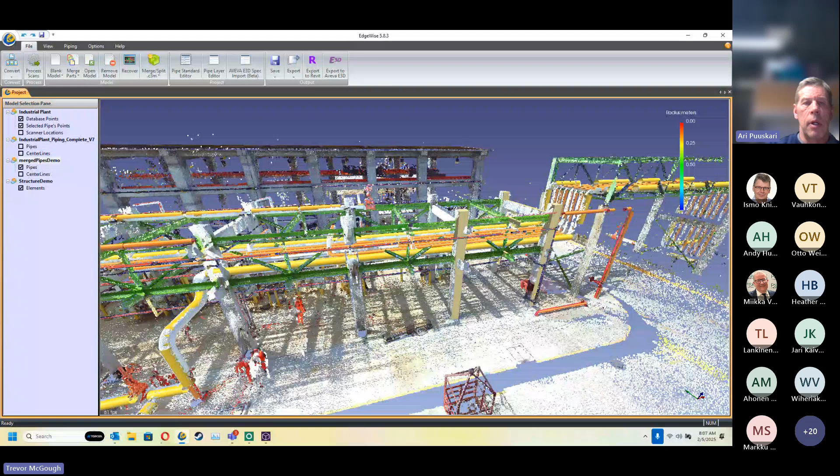So, up on screen we have Edgewise. What I've done to get to this point is take the point cloud data - in this case a registered point cloud - and process it through Edgewise, which has automatically extracted the piping. All these pipes currently on screen are automatically generated by the software with zero human intervention whatsoever - purely the result of automation.

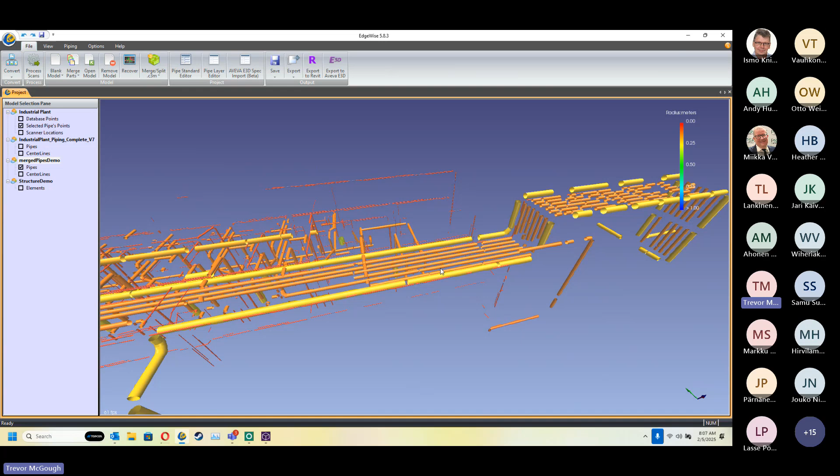This case involves about 20 scan files, which took about 45 minutes of computer processing to get to this point. The first key thing I want to show in the software is our QA/QC tools. For that, we have the part info spreadsheet right here, which contains all the numerics relating back to our visual model.

Coming back to that concept of QA, we have the QA mode. Inside the QA mode, I have the bore of the extracted pipe in gray, and in this teal, kind of green color, I have all the points used to extract out the pipe. I can quickly scroll through and do a visual inspection of my pipes, ensuring the highest level of accuracy between the point cloud and the pipe.

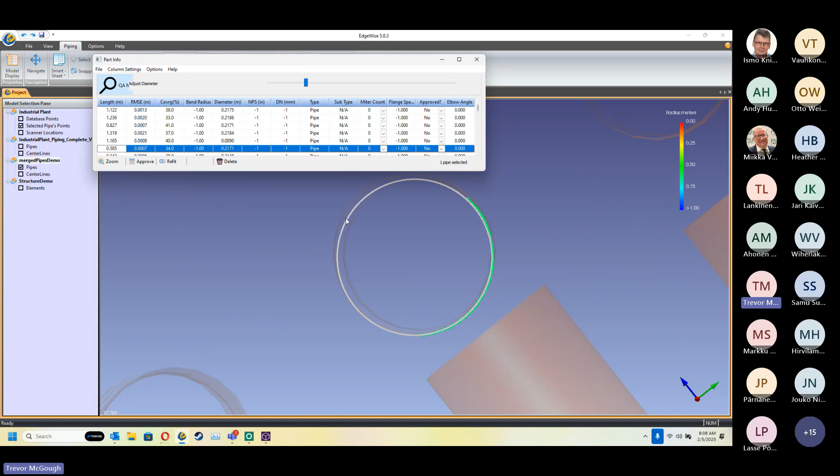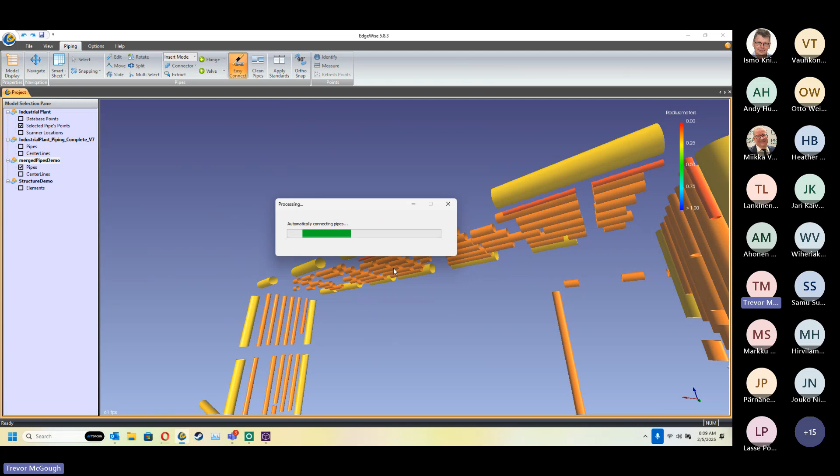The next thing I want to talk about is these little gaps. Scanning is a line of sight operation, so if there are areas where the scanner cannot see, like behind structural steel blocking the scanner, there's no data, no pipe. Instead of going through and doing these connections manually, this is where I have the Easy Connect tool, where Edgewise will automatically insert connections, both straight and elbow connections throughout my project, and that only takes about a second.

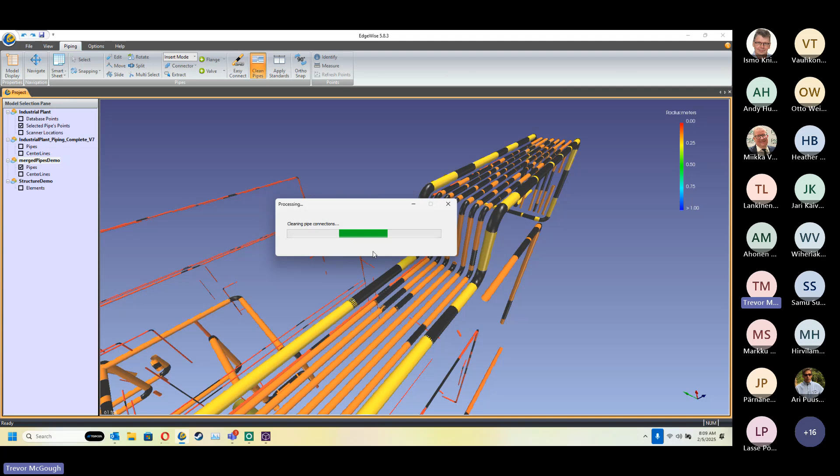The next key thing I'll introduce is the Clean Pipes tool. The Clean Pipes tool is rather unique in that it has a tolerance. That tolerance allows me to control how as-built or as-designed the model will be. I can make more straight, perfect pipes, or choose to make pipes that are more as-built, with more sags or deviations. I can control that at either a project level, or for individual pipe runs.

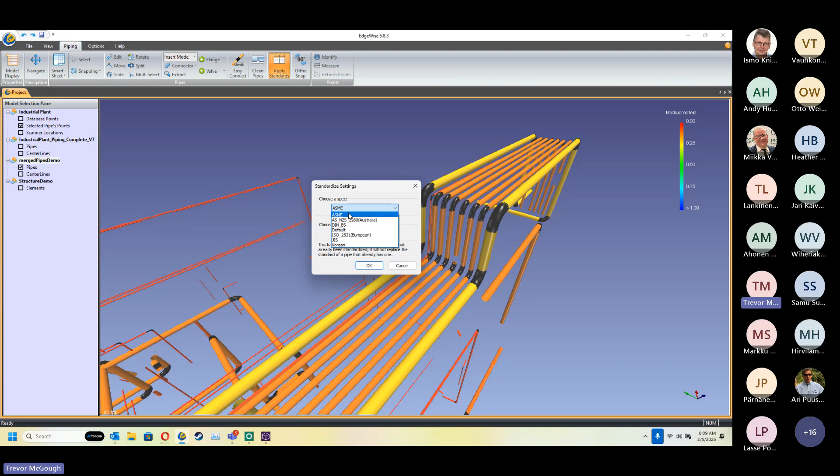Next up, we have applying standards. With apply standards, I can choose one of our specs from out of the box, like the ASME spec at 150 PSI, and click OK. You'll notice a slight shift, as this is where Edgewise takes the diameters found from the scan data and matches them up to the closest standard spec diameter.

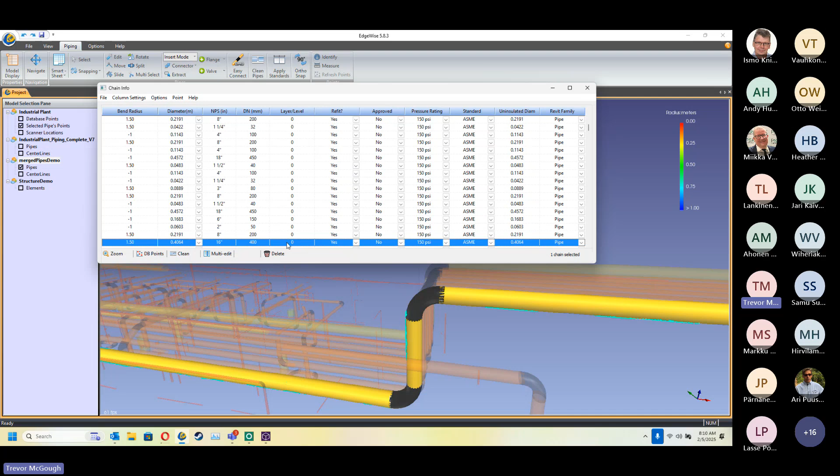The last thing I'll touch upon is the chain info spreadsheet. This allows me to see information relating to the whole pipe run, including layers and levels, diameter information, and Revit families. One critical thing to point out, especially when working in oil and gas like with AVEVA's E3D, is that the layers are how we assign line information, ensuring it is properly transferred from Edgewise into E3D under the correct hierarchies. Those layers are especially important when working with the AVEVA ecosystem.

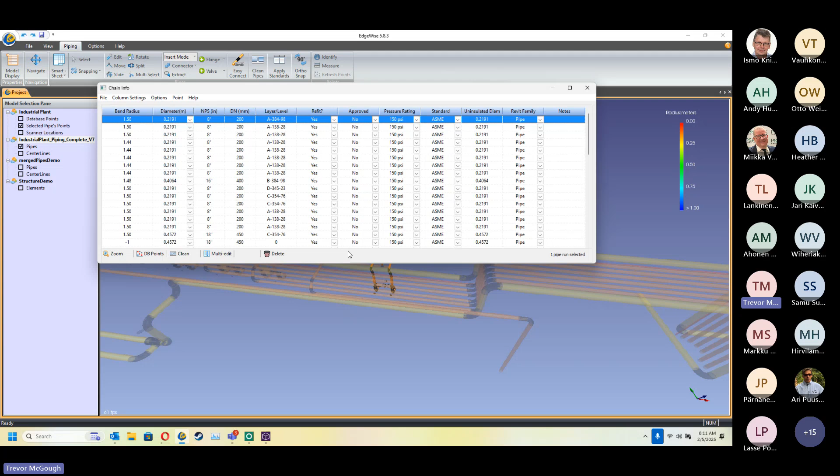Speaking of that, let's take a look at exporting from EdgeWise into AVEVA. I'll switch over to my completed model, which is about 2 hours worth of work, where I've cleaned things up, done my connections, added some componentry, and assigned the correct information for my pipes. At this point, I'll go ahead and pop this out. We have our export to AVEVA E3D right here.

I'll go ahead and save this to my desktop real fast. Let's do this. Webinar.

Now let's switch over to the E3D application. My little disclaimer: I make no claims of being an expert in E3D.

Let me go ahead and import this in. I'll drag and drop that macro file I just exported right here, come over, and pop this in. Let's go.

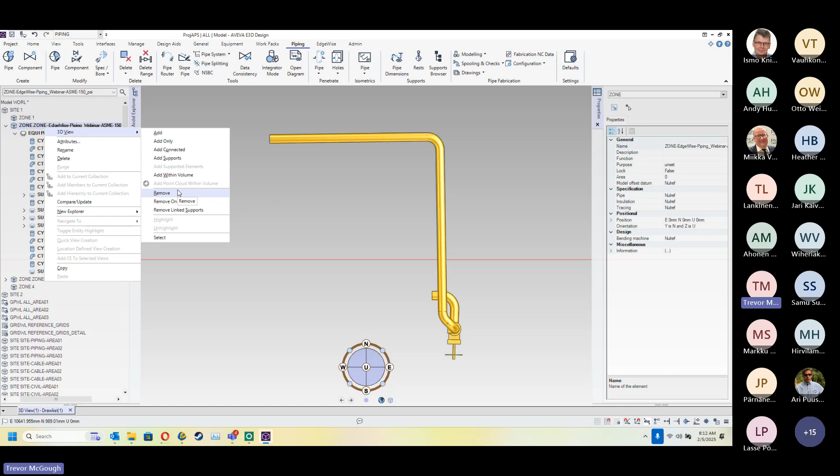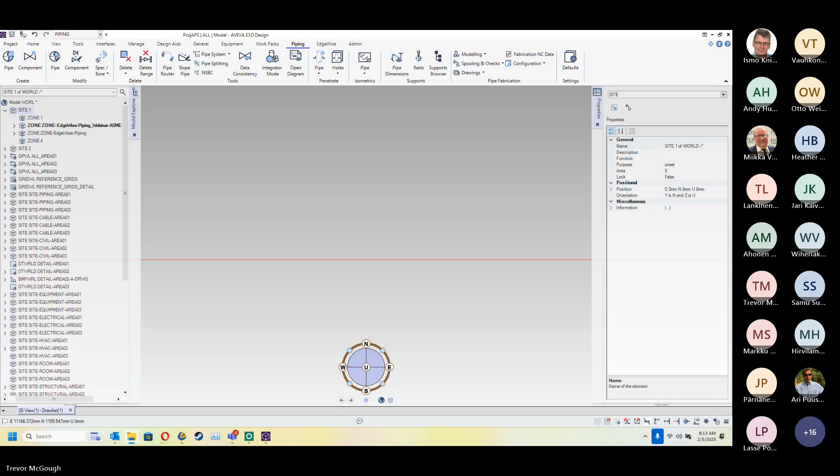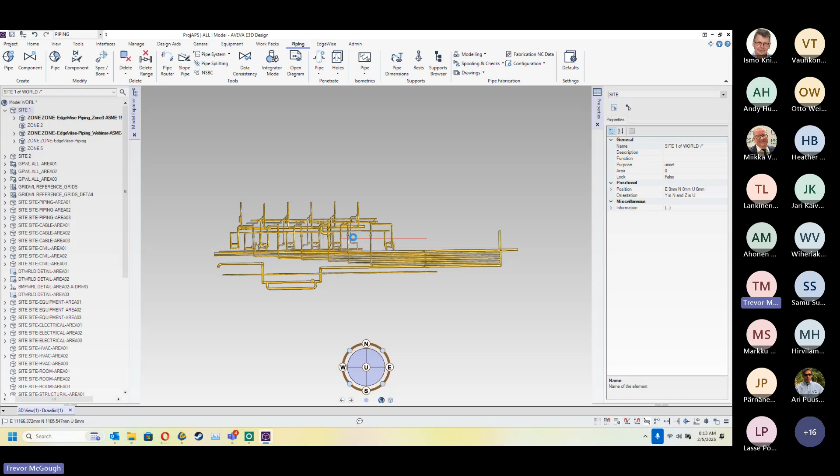Oops. Oh, that's why. Okay, that took me a second. I was putting it in the wrong zone. There we go. Whew. Still early in the morning over here.

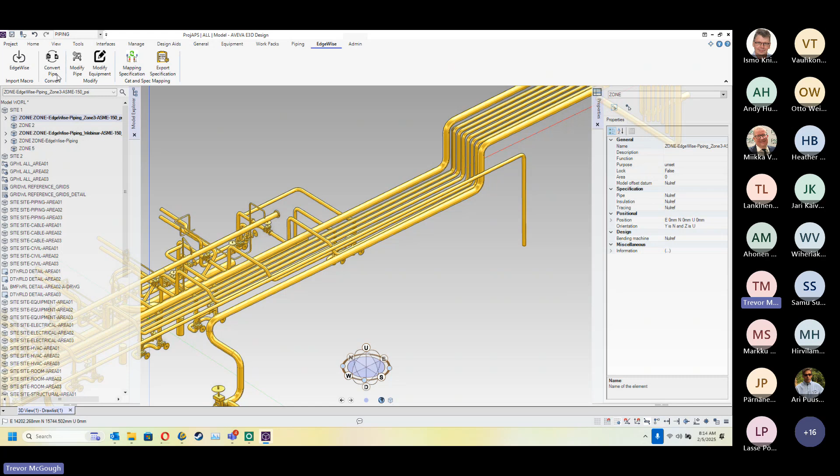So now that we have the pipes loaded in, this is where the cool part happens. Up here at the top, behind the little Teams toolbar, you'll notice there's a new Edgewise tab, and this is the plugin that we've developed that allows us to convert from what we have currently, which is our equipment, over into the intelligent piping. So to actually do that workflow, I'll click Convert Pipe right here, and then we have a couple things.

Number one, at the top, I can select my spec. I only have the default specs loaded right now, but if you have your user-defined specs, this is where they would be. Once I do that, I can convert the equipment that I have loaded in. So I'll just grab that one right there, click Load Equipment. You can see there's a little loading bar down here at the bottom, and this will load up all the equipment that was initially brought in from Edgewise into AVEVA E3D. And that way I can begin the conversion process.

This is the part that probably takes the longest in the demo, so bear with us. All right, we got that loaded in now. And so now I'll go ahead and set my export zone. So right here, we have zone 5. We'll go ahead and click Store Zone.

Now that we have everything loaded up, let's go ahead and do Convert Primitives to Pipe. So this will begin the conversion process like so. And then at the end of this, we'll have our fully intelligent pipe runs converted from what Edgewise brought in as the initial equipment into the intelligent piping that we would like inside of AVEVA E3D.

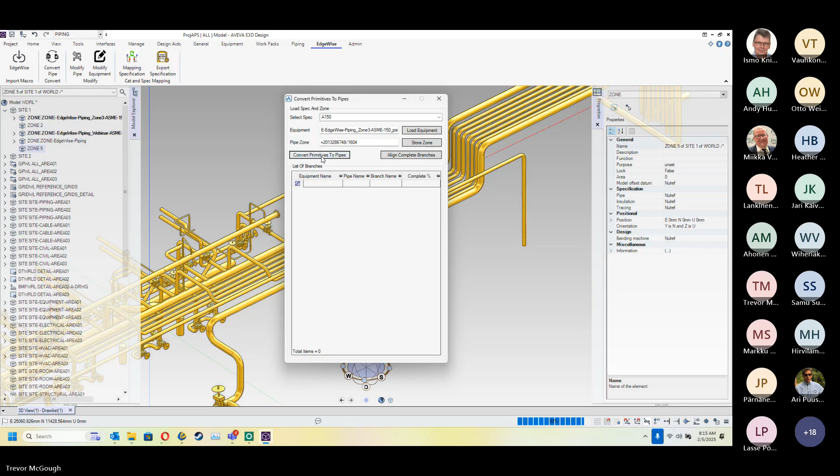So there are a couple of questions. How does it work when pipe is insulated, and how does it work with sloped pipes? Yep. So to answer both of those questions, number one, insulation. With insulation, the scanner can only see the outside diameter. And so by extension, that is what Edgewise will extract the piping to, since that's what the scan data captures.

So you have two things you can do. You can either A, export out the insulated diameter from Edgewise, or B, back inside of Edgewise, you can manually use the spreadsheets. If you know what diameter should be there, you can manually override and select a different diameter, like that. So either or, but again, with insulation, Edgewise will extract it out to the insulated diameter, since that is what the point cloud captures.

The second one, slope and in general as-built conditions. With slope and as-built conditions, Edgewise will capture those right off the bat. The thing is, depending on what application you're going into, for example AutoCAD, Revit, AVEVA E3D, some of those applications are more design focused, so they don't usually accept some of the as-built conditions.

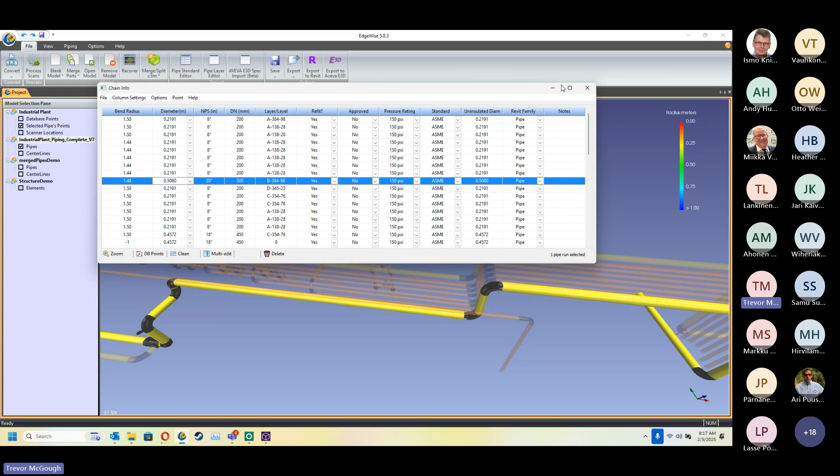So in that case, we have several tools, including snapping tools right here, as well as modifying the tolerances in my Clean Pipes tool to get rid of some of those as-built conditions and make the pipes a little bit more as designed, so that way they can import better into some of these design applications, like Plant 3D or AVEVA E3D. So in general, yes, Edgewise captures slope, but there are some export limitations, depending on what application we're bringing them into. And speaking of export applications, let me go ahead and minimize that.

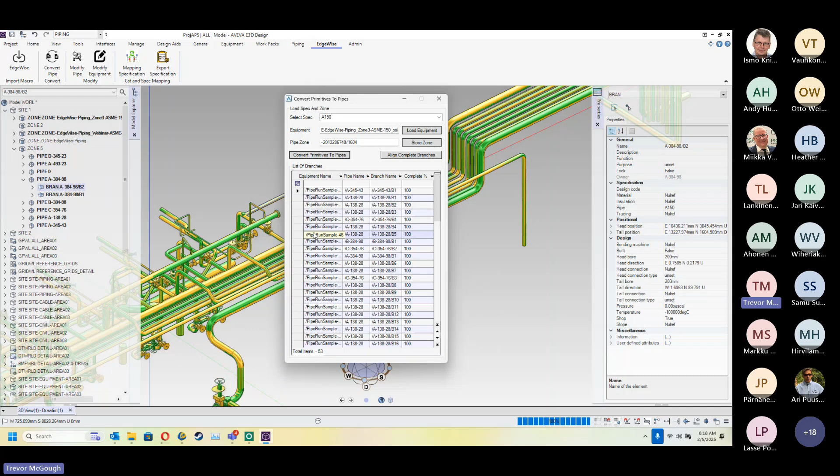Here we have all our pipes converted, so we can see everything right here, our different branches completed inside of AVEVA E3D. So if I go ahead and kill that, let me go ahead and... it always takes me a sec bouncing between different softwares. There we go. So now we have all our pipes loaded in.

If I select a run, we can see the information, everything brought in right here. Again, all of this is fully intelligent pipe runs brought in from Edgewise into E3D. And then once it's inside E3D, we can use our plugin to convert it over to the fully intelligent specs. So there it is.

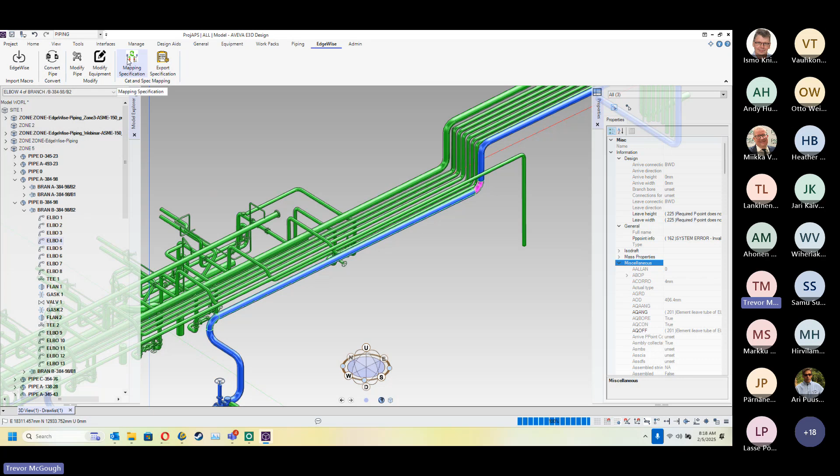And again, I make no claims of being an expert on E3D, so if there's anything anyone wants to see, by all means, feel free to type it in the chat, and I'm more than happy. It might take a second, but I can click on the correct buttons to see it.

Yeah, there are a few questions, Trevor. Yep. There is one more question. Does it work with different standard profiles? Yep, so that's something we put a lot of effort into. Again, especially inside of E3D, ensuring that you can use the custom specs you have developed.

So if we go back inside of Edgewise, we have a special little one right here for a spec import, currently in beta. So that way you can import the specs from E3D and use them inside of the Edgewise software to ensure your Edgewise model is inside of that spec. And then when it pops back out into E3D, everything should be properly aligned. So it should be a little bit more of a bi-directional integration.

Sweet. So again, that is the piping. Okay. And that is how we can take the piping from Edgewise into E3D like that. So any other questions before we... yes. So one thing, yes, the pipes do initially, keyword initially, come in as equipment, and then using the Edgewise plugin that we have developed right here, we can take that equipment and convert it into the intelligent pipe.

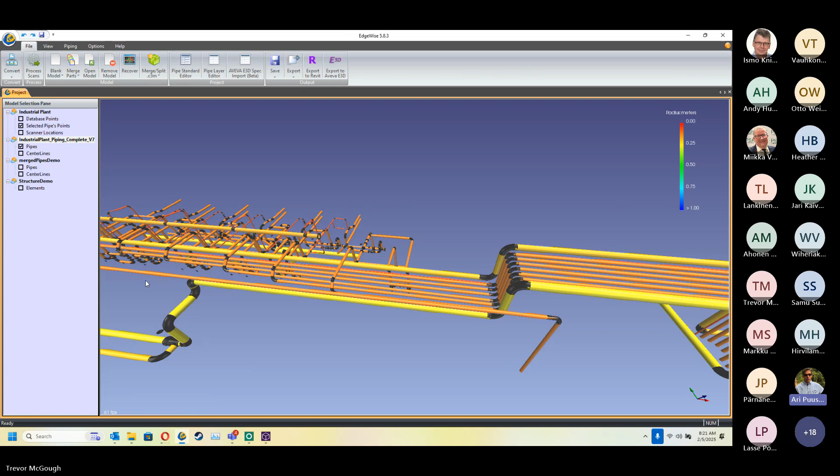So somebody asked a question on the pipe supports. Okay. We don't do the details, so we're not going to do the pipe supports. On the pipe support side, the only thing we're going to get is some of the actual spring hangers, the cylinders and the spring hangers. But the pipe supports we don't typically do. That's done in E3D or AutoCAD or Plant 3D or whatever CAD application they're using. Okay.

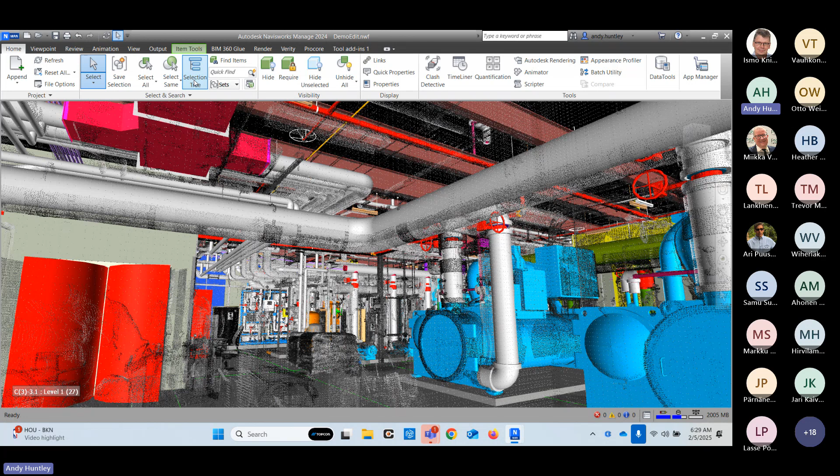Perfect. Okay, so our Verity software is a plugin that's directly inside of Navisworks. So you can see a project just like this one here. What we're going to do is I have a predefined selection of items that I'm going to grab. It's about 15 different items in different geometry shapes. So as you can tell, we can check piping, we can check walls, rectangle boxes, and if we want, we can also check equipment.

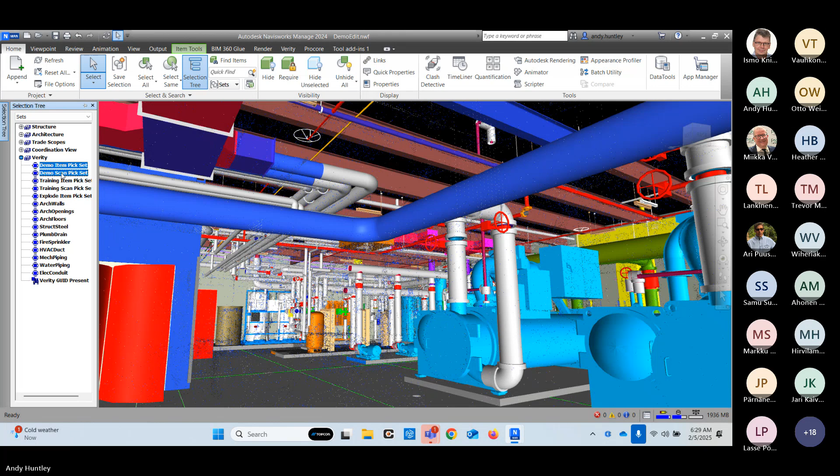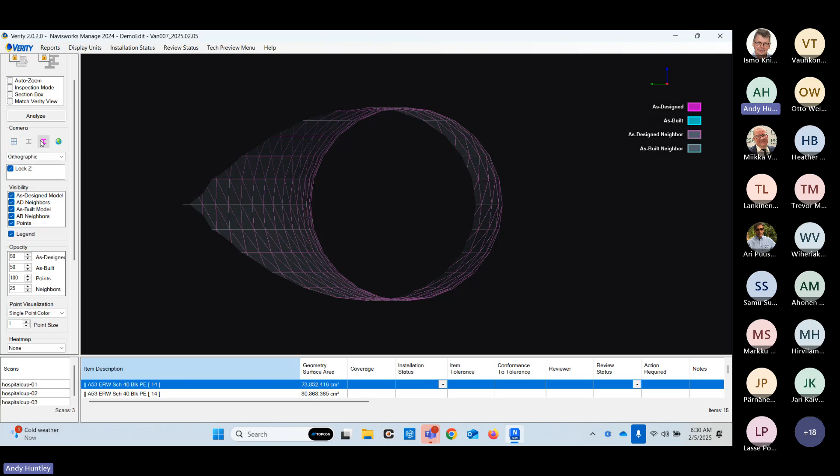The other thing I'm going to select is my point cloud. Once I have these 2 items selected, we have a tab right up inside of Navisworks called Verity. Then we're just going to add these items into Verity. When we do that, Verity will open just like so. And as you can see, I have each item of those 15 in here. We can have 4 different views, top, down, left, or right, and front view plus an isometric type view.

Right now, there is no verification between the 2 items because we haven't run the analysis. So what you're seeing here is the design model. With that being said, let's go ahead and run the Verity analysis. When I click on the Verity analysis, a pop-up window will occur. It's going to ask what type of data are you working with? Are you working with tripod terrestrial scan data that is structured, or is this tripod data unstructured?

Next is also SLAM data. We can work with pretty much any of the SLAM scanners out there, be it NavVis, GeoSLAM, or the new Faro scanners. We can work with it and bring it in. But for this one, we're going to stick with the tripod scanner. The next is what type of workflow are we looking for? Are we doing construction verification? Are we progress tracking? Or are we going to be checking our model against the point cloud to determine that the model has been modeled correctly to the point cloud? But for this one, we're just going to do the construction verification.

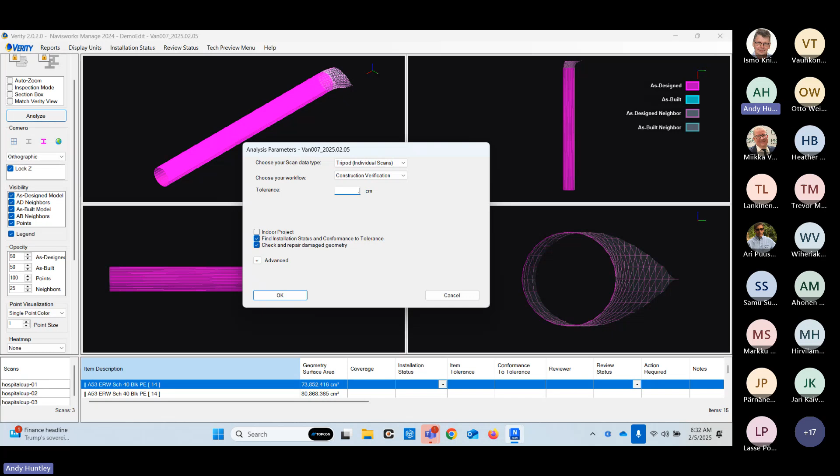And then lastly, what is the tolerance level? This can be whatever you want it to be. For this, I'm going to just say 3 centimeters. If I want it to be a tighter tolerance and say 1 centimeter, we could do that. Or we could even go down to like 0.5 centimeters. The tolerance level is user defined. So for this, we'll leave it at 3. It's not an indoor project, and then I'll let it go.

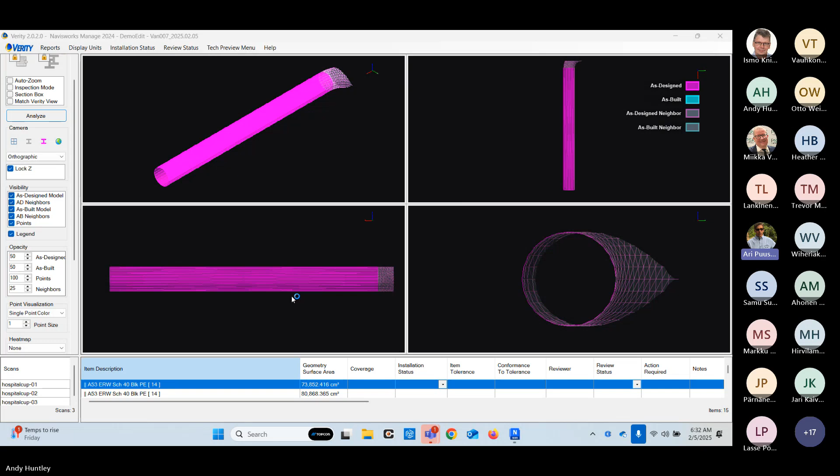This is going to take just about a minute to do. And so what it's doing now is it's comparing the point cloud to the individual model pieces. And it is finishing up now. Once it's done, we'll get this beautiful looking pie chart.

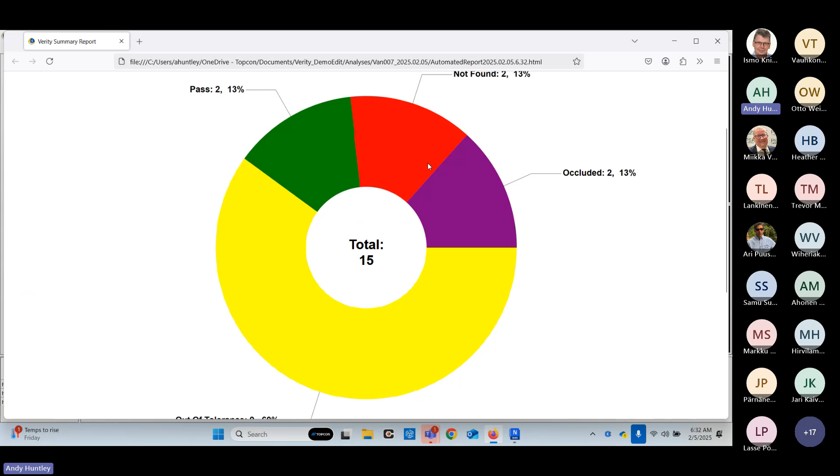This pie chart will tell me out of the 15 items I checked, 2 of the items were installed correctly, 2 items were not found, 2 items were blocked, be it somebody was standing in front of the item or there was a wall in between. So Verity is not going to sit there and tell you, hey, it's not there. It has the intelligence to know that we can't see it. And then the remainder 9 items were installed out of tolerance.

Also, we get all of the numbers behind it. So we can see in here what was our total install error, the largest to the smallest. We also get to see how much of the project has been installed based off of all the items we've chose. So this one page is very detailed and it gives us a lot of info overall.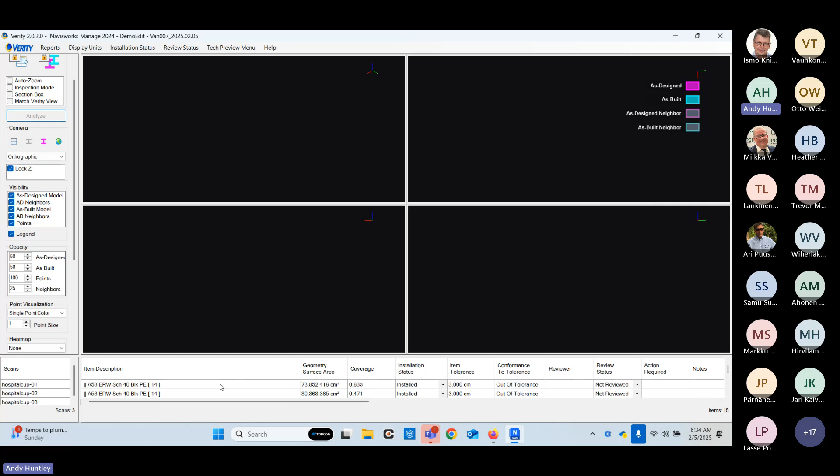Now, if I come back to my Verity, we can see that our table here has got some more info filled out on it. So if I click on this first pipe, now we can see I have the purple design. The blue is our as-built pipe in the as-built location. And then we have the point cloud turned on. Let's get rid of the as-designed neighbors and as-built neighbors and point cloud. So now we can start to see how far off these are.

We do have some basic tools inside of Verity to check the dimension if we want. So I can easily just pull, or I can come right into the table and the table will tell me the same info. So once I go through here, I can go in and say it's out of tolerance. I can even say I reviewed it, action item. We can put an action item in it now, or we can wait. And the reason I say we're going to wait is we can run a clash detection on this.

So this same pipe here, what makes Verity really powerful inside Navisworks is I can, one, apply the coloring just like the pinwheel to this one item, so I know it is out of tolerance spec location. I can do it for just this one item, or I can do it for all of the items.

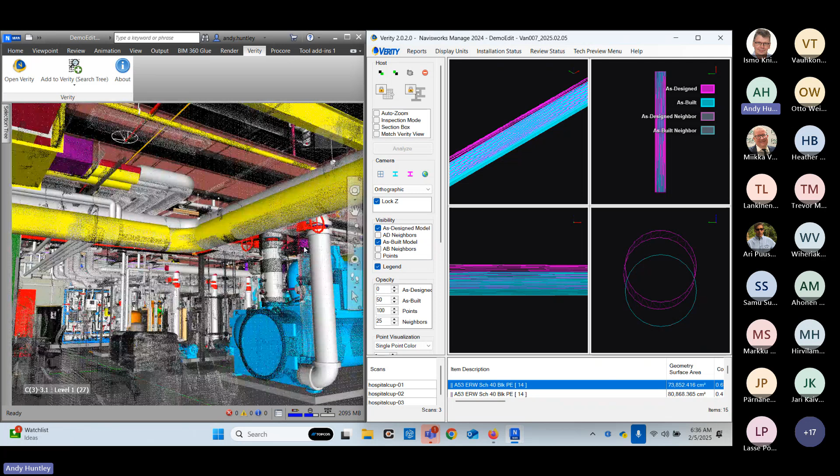But what's really, really powerful is if you keep an eye on this pipe, we can move the geometry to the as-built location. Now, this is not permanent because Navisworks is not a modeling software. It's a model viewer software, but it gives us enough time to move all of the geometry to the as-built location. Then we can run a clash detection.

After the clash detection is done, and now I see that there's some issues, I can come back into Verity and say, needs to be moved. And so this action item is now attached to this item. And when I go into create my reports, it will be attached to this item. So I'm gonna go ahead and create our report.

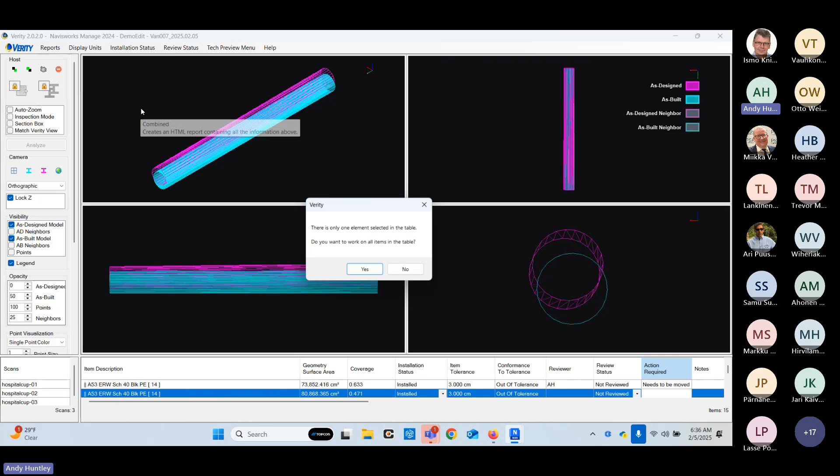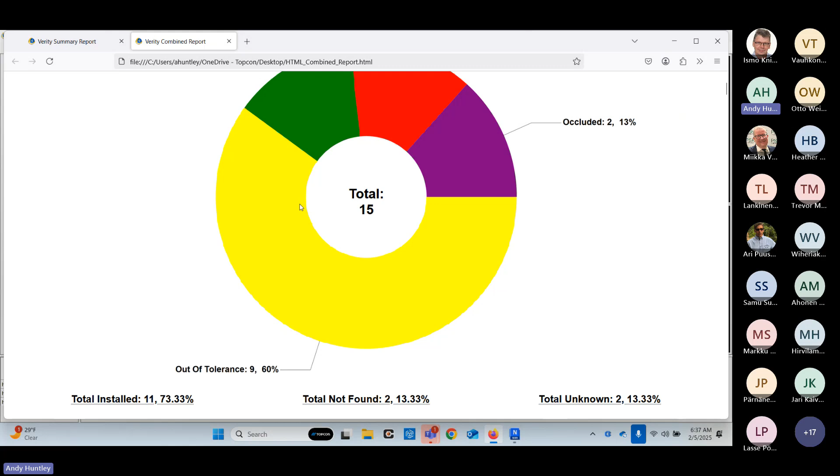We're gonna put it on the desktop so I know where it's located. And so it will create an HTML report that we can email to anybody that has a smart device, a laptop, tablets, anything like that. And so they'll get this report here, along with all the other information as well.

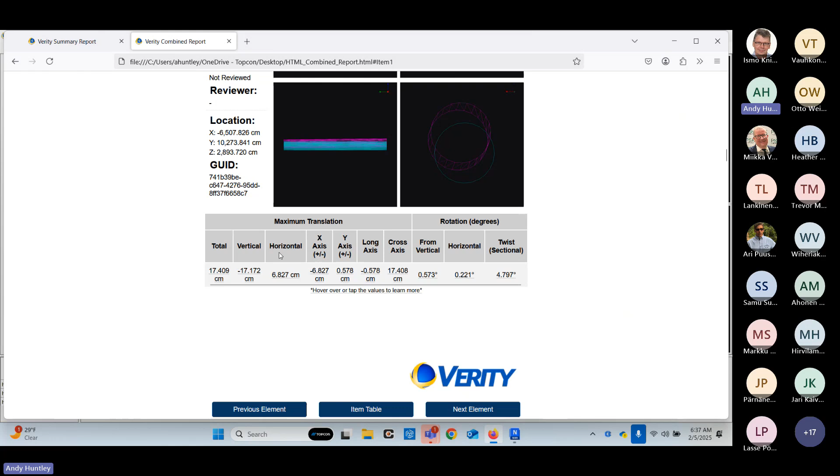And then when I click down here, here's the info on the pipe and the action item that needed to occur: needs to be moved. And so we can see all of our different analysis for all the different pipes, beams, ductwork, walls, anything and everything like that. And so that is how our Verity software is very powerful.

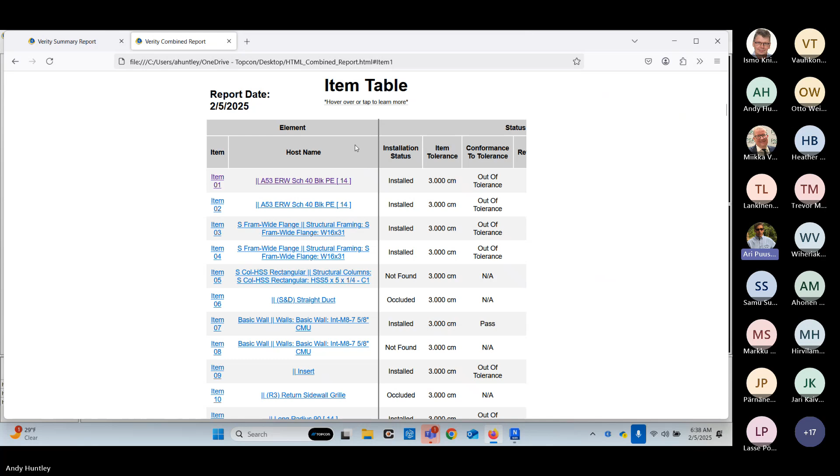Just so people know, Verity runs, we showed it with Navisworks. If anyone is using Revit, it also runs inside of Revit as well. I think quite many of the participants are working in the industrial sector, so they probably are more likely running Navisworks and not Revit, but it's good to know.